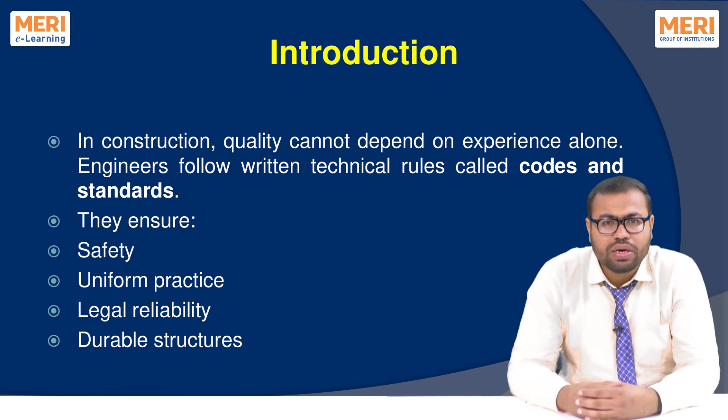life of structures. For example, if two engineers design the same residential building in two different cities, the building should still satisfy the same minimum safety requirements. This uniformity is possible only because of engineering codes and standards. Next one is: what are codal provisions?

Codal provisions are officially approved technical rules issued by recognized national or international authorities. They act as a technical guidebook for engineers. Codal provisions guide engineers at every stage of construction, that is, planning, structural design, material selection, construction methods, testing procedures,

inspection and quality checks. For example, IS 456 specifies limits for reinforcement spacing, concrete grade, and cover to reinforcement. If an engineer ignores these limits, problems such as cracking, corrosion, or even collapse may occur. Therefore, codal provisions are mandatory in engineering practice and are also legally enforceable.

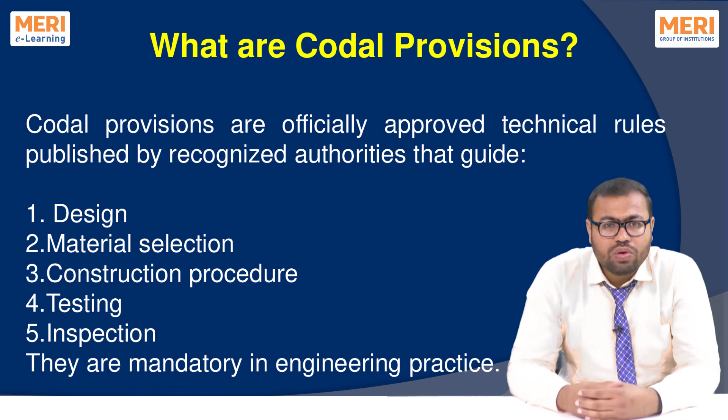Next one is importance of codal provisions. Codal provisions play a vital role in preventing structural failures and accidents. They ensure that every structure meets a minimum acceptable safety level even under extreme conditions. For example, if a residential building is designed without following earthquake resistance provisions, it may collapse during seismic activity.

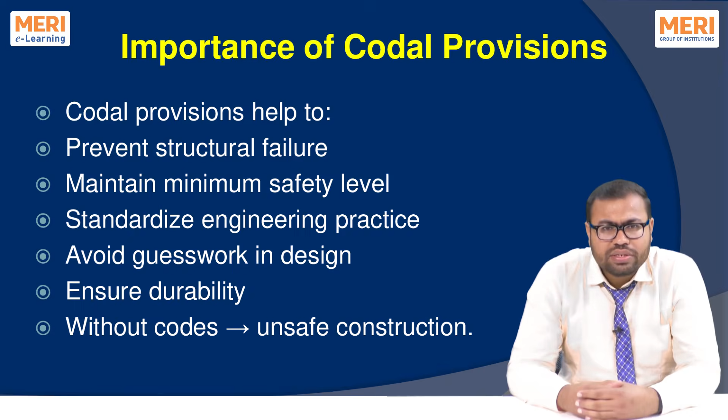Similarly, ignoring wind load codes in high-rise buildings can result in excessive sway or failure. Codal provisions also standardize engineering practice across regions and projects. They reduce guesswork and provide scientifically tested data, making construction safer, economical, and reliable. Next one is types of standards used in construction.

Construction engineering uses standards developed by both national and international organizations. Some major organizations include BIS India, IRC India Roads, ACI USA Concrete, ASTM USA Testing, and IS Code Indian Standard. For example, BIS standards are mandatory in Indian government projects, while ASTM standards are commonly used for laboratory testing

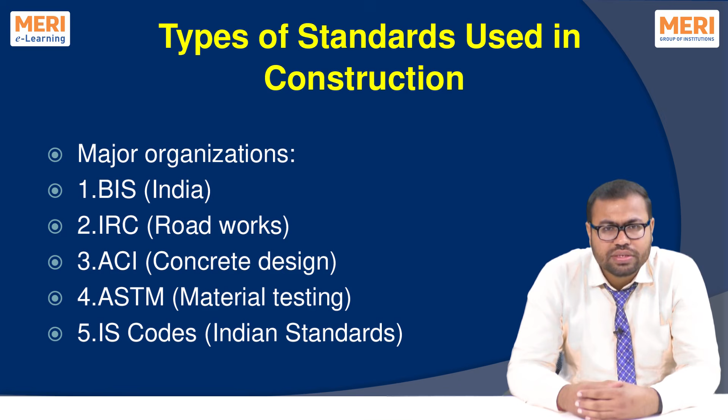in international projects. ACI codes are preferred for high-rise buildings and metro construction. These standards ensure quality, safety, and global acceptance. Next one is Bureau of Indian Standards, that is BIS. The Bureau of Indian Standards or BIS is the national standard body of India.

It is responsible for developing and publishing IS codes. BIS publishes standards related to concrete, steel, soil mechanics, masonry, construction materials, and testing methods. For example, IS 456 governs concrete design, IS 800 governs steel structures. All government construction projects must strictly follow BIS standards. BIS ensures uniform construction quality across the country.

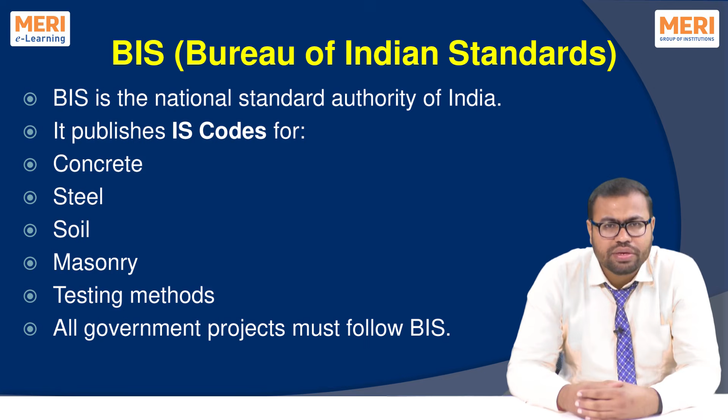Next one is important IS codes in concrete. Concrete is the most widely used construction material in civil engineering because of its strength, durability and versatility. Due to its extensive use, strict quality control is required and this is achieved through various IS codes. Several IS codes are dedicated to different aspects of concrete such as design mix, proportioning, production, placing, curing and testing.

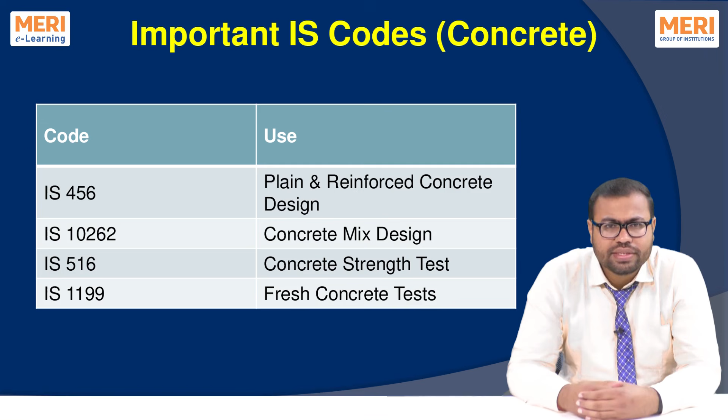For example, IS 456 deals with structural design, IS 10262 deals with mix design, while IS 516 and IS 1199 deal with testing of concrete. By following these IS codes, engineers ensure that concrete used at sites achieves the desired strength and durability. Failure to follow these codes can result in issues such as cracks, honeycombing, low strength, and early deterioration of structures.

Next one is justification of IS 456. IS 456 is the most important code related to plain and reinforced concrete structures in India. It provides detailed guidelines for structural design, reinforcement detailing, and durability requirements. The code specifies minimum grade of concrete, limits on reinforcement spacing, and requirements for cover to reinforcement.

For example, inadequate cover can expose steel to moisture leading to corrosion. IS 456 also considers different exposure conditions such as mild, moderate, severe, and extreme environments. Structures in coastal or industrial areas require higher durability provisions. Thus, IS 456 ensures that concrete structures remain safe, durable, and serviceable throughout their design life.

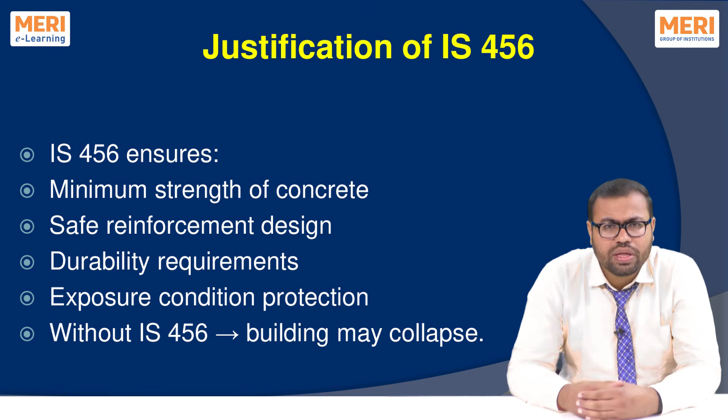Next one is justification of IS 10262. IS 10262 provides a systematic and scientific approach to concrete mix design. It helps engineers calculate the correct proportion of cement, water, fine aggregate, and coarse aggregate. For example, increasing water content may improve workability but reduce strength.

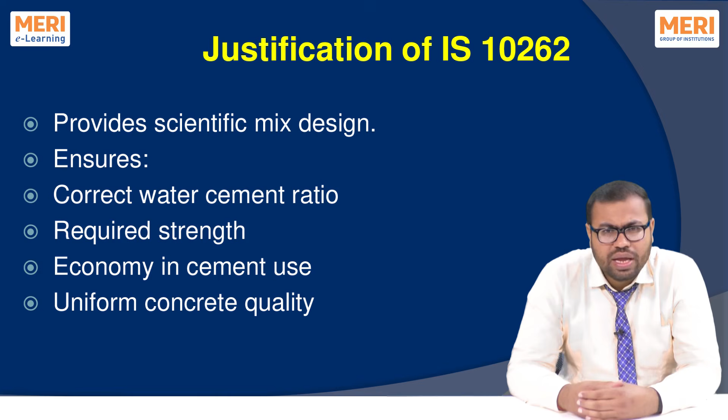IS 10262 helps maintain the correct water cement ratio to achieve both strength and workability. Proper mix design also ensures economy, as excess cement increases cost without improving performance. By following IS 10262, engineers can produce consistent and high quality concrete at site. Next one is justification of IS 516 and 1199.

IS 516 and IS 1199 are important codes related to testing of concrete. IS 516 specifies procedures for testing hardened concrete, especially compressive strength using the cube test. This test verifies whether the concrete has achieved the design strength. IS 1199 deals with tests of fresh concrete such as slump test, compaction factor test, and VB test. For example, low slump indicates stiff concrete, which may be difficult to place and compact.

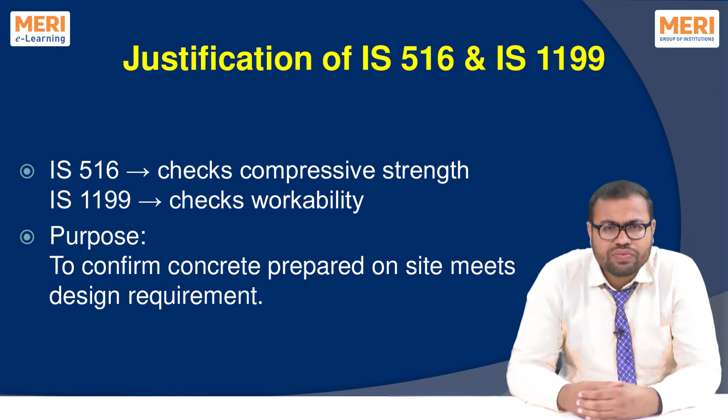Together, these codes ensure that concrete quality is continuously monitored and controlled during construction. Next one is steel related IS codes. Steel reinforcement is used in concrete structures to resist tensile stresses. Therefore, the quality of steel plays a crucial role in structural safety. Steel related IS codes specify different grades of steel such as Fe415 and Fe500 along with their mechanical properties. They also define requirements for ductility, elongation and testing methods.

For example, higher grade steel provides greater strength but lower ductility. Selecting the appropriate grade as per design is essential to avoid brittle failure. Thus, steel IS codes ensure strength, safety and reliability of reinforced concrete structures.

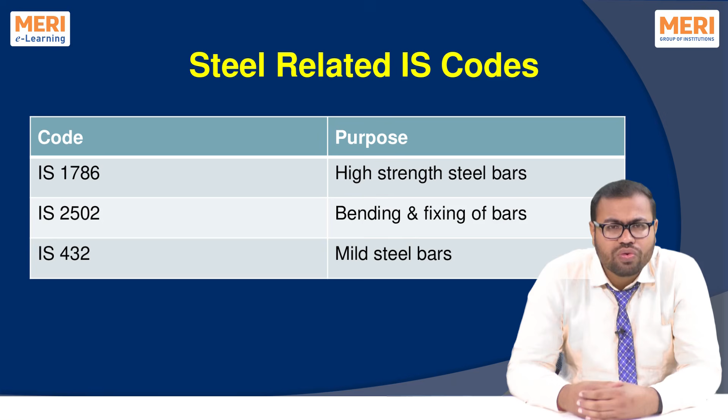Next one is IRC codes, which are used in road construction. IRC stands for Indian Roads Congress, which is responsible for developing standards related to road and bridge engineering in India. IRC codes provide guidelines for planning, design, construction and maintenance of road infrastructure. These codes consider factors such as traffic intensity, axle loads, soil condition, and climate.

For example, highways carrying heavy trucks require stronger pavement compared to rural roads. IRC codes ensure uniformity in road construction practice and improve safety and serviceability of transportation systems. Therefore, IRC codes are mandatory for all highway and bridge projects in India.

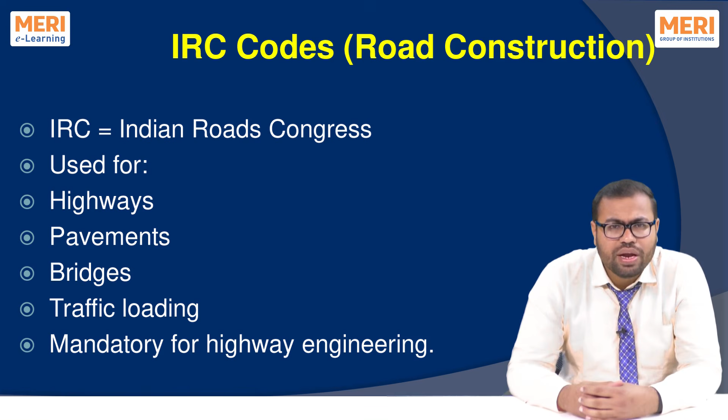Next one is important IRC codes. Now, let us understand some important IRC codes that are widely used in road and bridge engineering. IRC 37 is used for the design of flexible pavements. It considers factors such as traffic volume, axle load repetition, subgrade strength, and climatic condition. For example, a highway carrying heavy commercial vehicles requires a much stronger pavement compared to a village road.

IRC 112 is used for the design of concrete bridges. It provides detailed guidelines for load combination, durability, and safety of bridge structures. Bridges designed without following IRC 112 may face premature cracking or structural distress. IRC 6 specifies load standards including dead load, live load, and impact load on bridges. IRC 15 provides guidelines for concrete roads, which are increasingly used due to their long service life. These IRC codes together ensure safe, durable, and efficient transportation infrastructure.

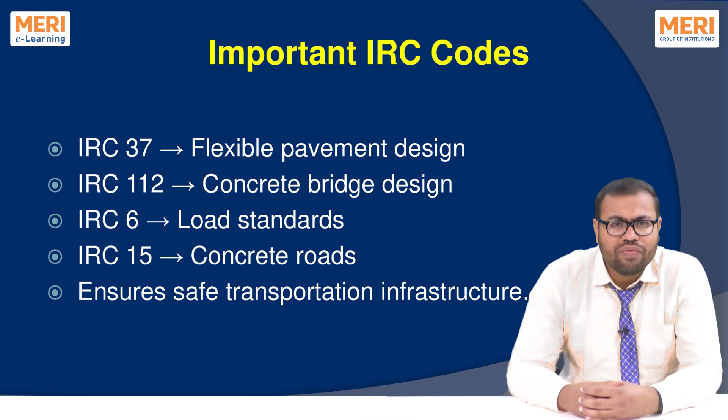Next one is ASTM standards. ASTM stands for the American Society for Testing and Materials. ASTM standards are internationally recognized and widely used for material testing and laboratory procedures. ASTM standards specify test methods for cement, aggregate, steel, bitumen, and concrete. For example, ASTM tests help determine compressive strength, tensile strength, and material durability.

In many international and multinational projects, ASTM standards are preferred because they ensure uniform testing procedures across countries. They help engineers compare results accurately and maintain consistency in quality control. Thus, ASTM standards play a crucial role in ensuring reliable and standardized testing practice.

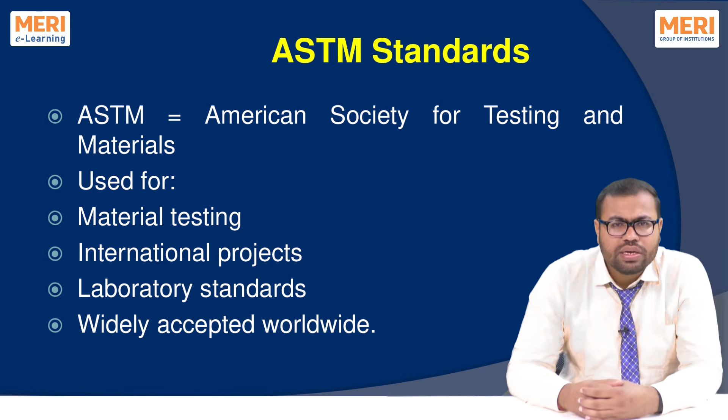Next one is ACI codes. ACI stands for the American Concrete Institute. ACI codes provide advanced and research-based guidelines for concrete design and construction. ACI standards cover topics such as crack control, durability, serviceability, and earthquake resistant design. For example, in high-rise buildings located in seismic zones, ACI provisions help control cracking and improve ductility.

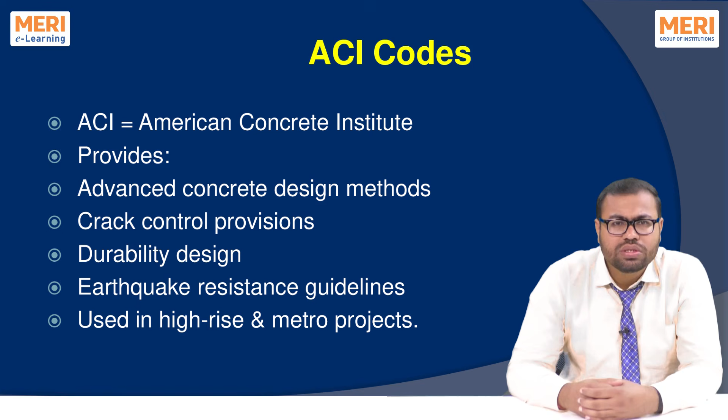ACI codes are commonly used in metro rail projects, tall buildings, and international construction works. They are known for their modern approach and continuous updates based on research. Thus, ACI codes contribute significantly to safe and advanced concrete construction practices.

Next one is contract specification. Contract specifications are written documents that form an essential part of construction contracts. They clearly define what materials to use, how the work should be executed, and what quality standard must be maintained. For example, specifications may define the grade of cement, the type of aggregate, curing, and workmanship standards. They also specify testing frequency and acceptance criteria.

Specifications act as a legal document between the client, contractor, and engineer. In case of disputes, specifications are used as a reference to resolve issues. Thus, contract specifications play a vital role in maintaining quality and legal clarity.

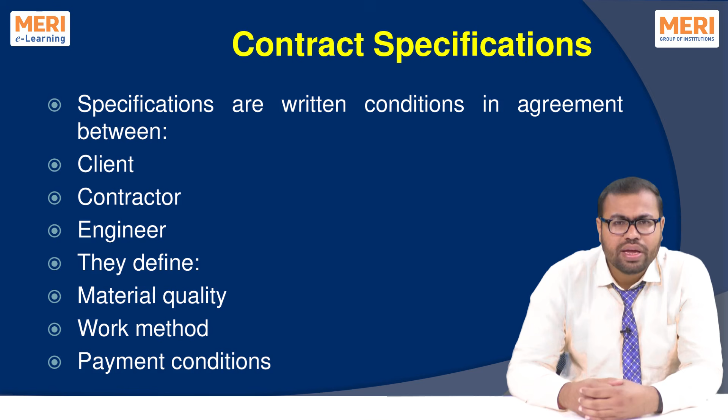Next one is types of specification. Specifications can be classified into different types based on their purpose. General specifications provide an overall description of materials and workmanship. Detailed specifications describe each item of work in detail, including materials, methods, and measurements. Standard specifications are commonly used for routine construction works.

Special specifications are prepared for unique or complex projects such as bridges, tunnels, or special foundations. For example, a standard specification may apply to normal concrete work while a special specification may be required for underwater concreting. These specifications ensure clarity, consistency, and quality control in construction projects.

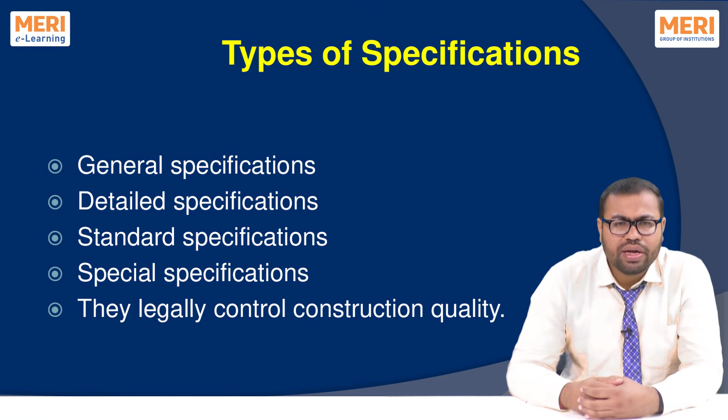Next one is acceptance criteria. Acceptance criteria define the minimum requirements that must be satisfied before approving construction work. For example, concrete cube strength must be equal to or greater than the design strength. Steel reinforcement must meet the specified grade and mechanical properties. Workability of concrete must lie within the specified slump range.

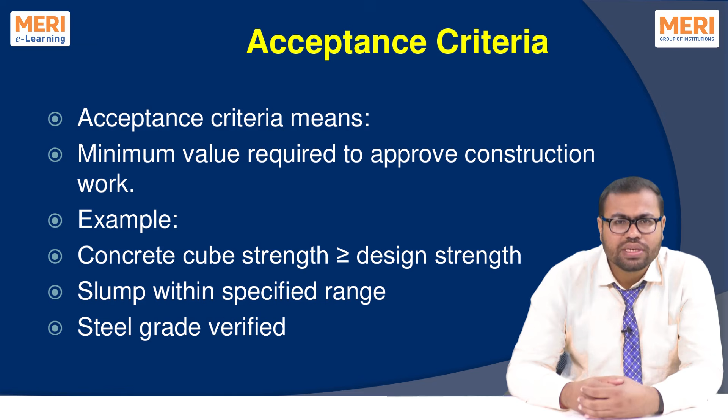If acceptance criteria are not met, the work may be rejected, repaired, or reconstructed. This ensures that only quality work becomes part of the final structure. Thus, acceptance criteria act as a final quality checkpoint.

Next one is role in quality control. Quality control in construction is achieved through a systematic combination of codes, specifications, and testing. Codes provide design guidelines, specifications control execution, and testing verifies performance. Together, they ensure measurable and verifiable quality.

For example, regular testing of concrete cubes helps detect strength issues early. This prevents costly repairs and ensures long-term safety. Quality control also ensures transparency in inspection and helps prevent disputes between stakeholders.

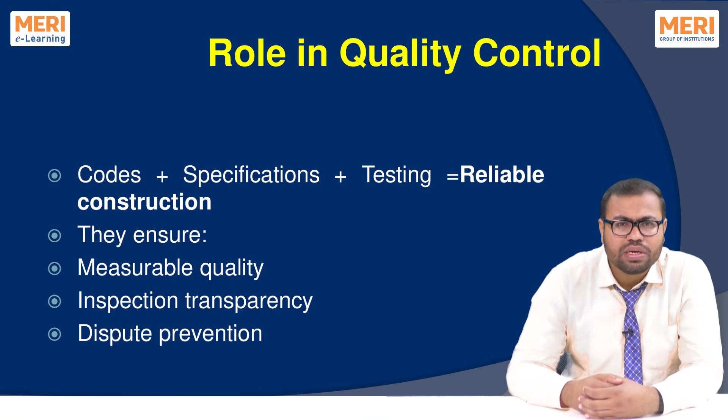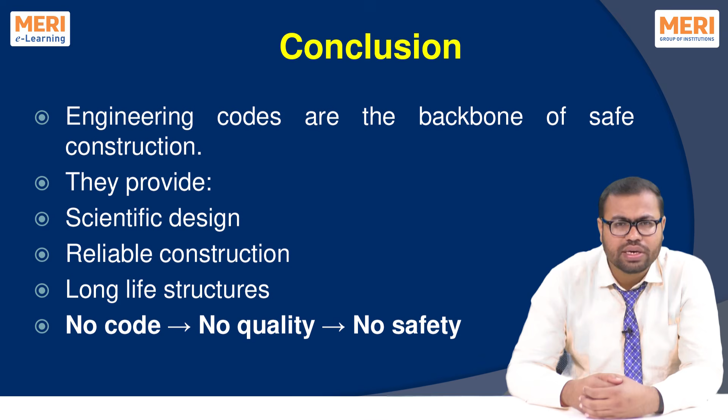Next one is conclusion. To conclude, engineering codes and standards form the foundation of safe and reliable construction. They ensure scientific design, standardized construction practice, and long-lasting structures. Ignoring codes may lead to poor quality, unsafe structures, and legal consequences. Therefore, every engineer has a professional and ethical responsibility to follow codes and standards strictly. Remember, no code means no quality, and no quality means no safety.